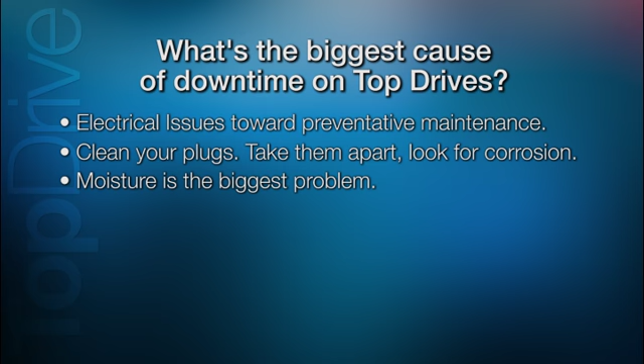It just depends on what part of the country you're in. If you're in Texas, there's a lot of heat. But when it gets cold and it goes back to heat, it causes that condensation. Same thing in North Dakota. It's just a little more extreme, because you have extreme cold going to not so cold, and when they're opening and closing them, they're not protecting them the right way.

I think the biggest mechanical issue would be changing oil. The oil changes and the frequency, and how often we send off our oil samples. If a rig manager is not keeping track of his oil samples, we're monitoring it here, and they are too. But if they're not monitoring it the way they should, then that will definitely cause mechanical issues down the road.

Yes, you're still seeing it where they're picking up with weight on the elevators. That goes back to training. We have a lot of high turnover in the oil field, and we're bringing up new people, and we've got to make sure they're being trained right. Just the simple things like that, knowing when to use certain equipment and how to use it. If a person's not trained, the fault goes on us for not training them right.

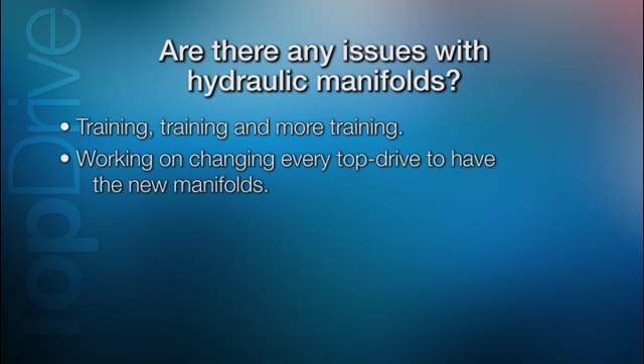Dave, we developed a steel manifold, and actually it's already out on 3 of our rigs, running good, haven't had issues with it, and we're working on changing every top drive from here on out. We'll have a steel manifold in it. We've had good reviews with it, and it's cost effective also.

I'd stress checking plugs. When you rig up and rig down, even with the new builds that we have, we don't take the derrick termination section out. It stays connected. But we should make it a habit to get up there and check it, completely take them apart and put them back together.

Because a lot of the downtime we see, you say electrical, but it's really just preventative maintenance and plug maintenance. If you don't know how to take care of that cord, you're going to burn it up. We're going to have to change it out. Unfortunately, it's a really expensive part.

No, I mean, it's training. It's who you're going to train, the next person up. The guy that's going to take your place. You want to make it a point that he knows what you need him to know. Because if we're not training them right, I said this when I was out in the field, you can't yell at the person for not doing something that you never showed them how to do.

Basic oil leaks, coolant leaks, engine vibration, anything that looks out of the ordinary, loose bolts, loose fittings, anything shaking, anything that shows signs of something wearing or something not tight. Every tour, at least 2 times a shift.

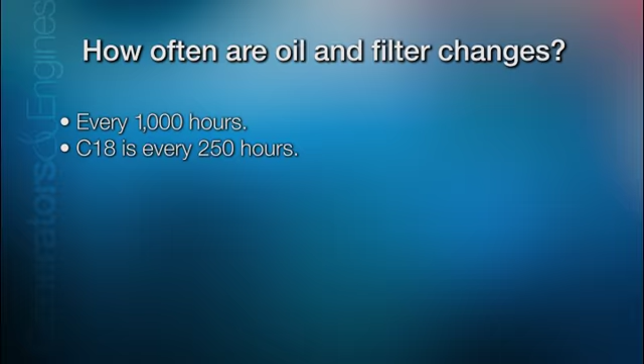On the 3500, there's actually a monitoring system that tells us when air filters are dirty, but if the motorman goes out there, takes a look at it and sees that the filters are black and dirty, change them. Don't take them off the rig and blow them out with an air blower. Actually change the filters.

On the engines, if it's got a drive hub with the fans, yes, they do have grease points on your idler gear and your fan bushings and your fan bearings. The thing is, as with the generators, we're trying to make sure all the guys are going out at least every 2 weeks and putting at least 6 or 7 pumps of grease per fitting.

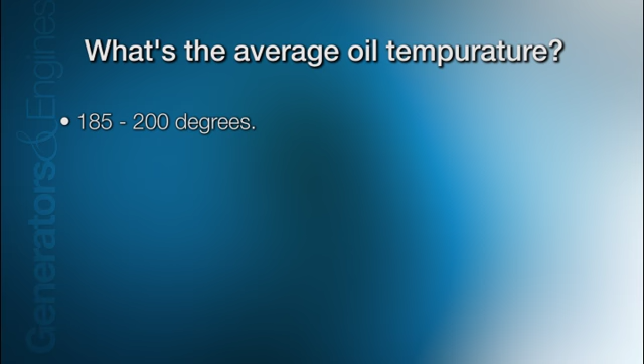The oil temperature is going to run about the same temperature as water temperature, as in the water cools the oil, so anywhere in between 185 and 200 degrees. If an engine's having a leak that we're having to keep the engine running at the moment to get us by, yes, we can put a little bit of water in it. But if it's not a leak, no, we should put coolant.

Any engine should have coolant in it, because the electrolysis in the water will eat up the block of the engine. You need to shut the engine off and fill it from the bottom, push the antifreeze up through the top. We need to change batteries at least once a year. It's cheaper to change a battery once a year than having a downtime.

Yeah, the Motorman report needs to be filled out with actual degrees, temperatures, you know, is it Celsius, is it Fahrenheit? I need to know numbers. I don't need to see an okay. I mean, okay, is it running a little warm? Is it running too cool? The engine's got to perform at a certain temperature to be efficient, so I need to have full numbers, temperatures and stuff like that. I don't need an okay.

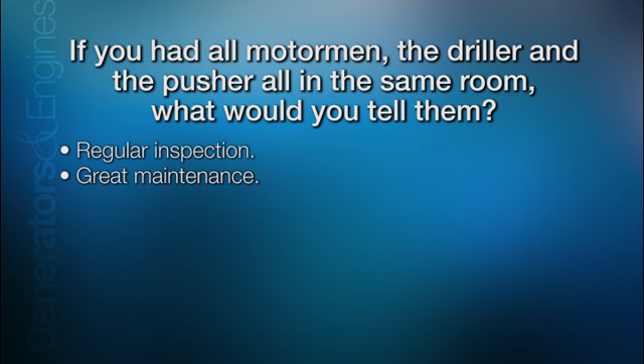Inspecting an engine and maintenance intervals is the number one key to keeping an engine's lifetime history. If you keep the maintenance intervals at the points that we set, it prolongs that engine to keep it going. If you bypass the maintenance intervals, you start having equipment failure, equipment damage. So anything that's out of the ordinary, bring it up to somebody's attention. Get a hold of somebody that can come out here and fix it, take care of it. That way it's not a failure.

Overheat, dirty radiators, lack of maintenance on our engines. Generators not getting bearings greased per intervals. So from $5,000 to $40,000, and if it's a complete engine failure, then you're looking at $145,000 to rebuild that engine once it comes into the shop. And that's not even the cost of the trucking to get another engine out there and back. Same on a generator, bearing failures are anywhere from $20,000 to $40,000. So maintenance intervals are a key to keeping this equipment up and running.

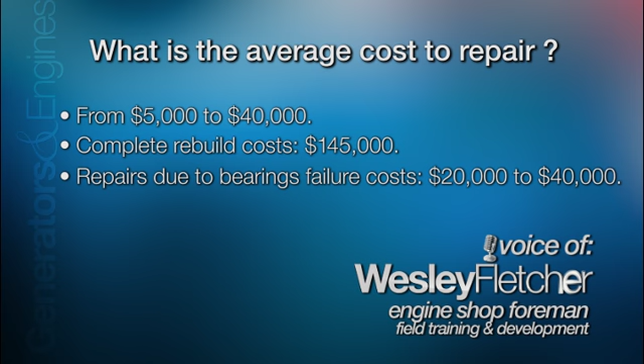We'll go through the fuel system, DFEs, engines, grease points, shut-off, lockout, tagout, everything on this end, and then we can kind of wander through the rig. You want to wander through the rig a little bit too, Frank? Well, no, because we're different parts of the tour. Just want to stay down at the drive house. Just stay in the drive house, go through the engines, and then maybe go to your shop, show you guys.

These are 3512s. It's kind of a standard engine package in the field. Just about everybody runs them. There are bigger rigs that run 3516s. Obviously, you get into a 2,000 or 3,000 horsepower rig, you need more engines. We're building the engine package for Mexico, and it's got five 3512s.

Fuel systems, we just burnt the pumps off of a rig this weekend due to fuel system failure again. So there's going to be a campaign coming out pretty quick about inspecting fuel lines, fuel systems, making sure your valves are in proper working order.

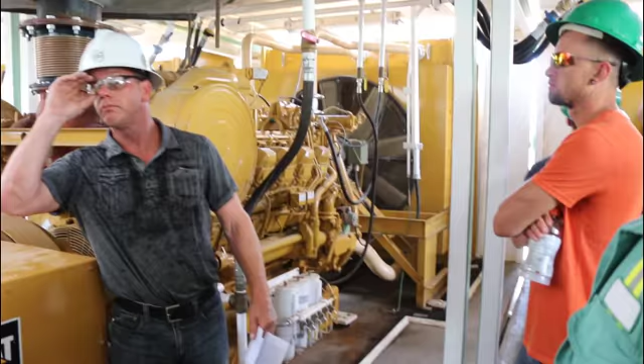All the fuel runs overhead. It's an open loop system. So it goes from the fuel tank, comes in, runs across, down. Here's your shuttle line. This is return, and that's feed. These engines require 20% of the engine's cooling to come from fuel. So we have to have a huge amount of, not pressure, but flow.

So don't ever work on an engine fuel system with the engine running, because you really have no control on that. And that's what happened in that situation. You didn't cut off the engine? Well, I can't speak for him, but there were two engines running and one was shut off, and he decided to work on the fuel system of the one still running instead of shutting it off and starting another one. But anyway, fuel systems, they happen to burn down very quickly. These are set up to change on the fly? Yeah, that's exactly what these are.

You know, you always have to have one on, right? But you can change those on the fly. I really don't recommend it. Yeah, in case something does happen.

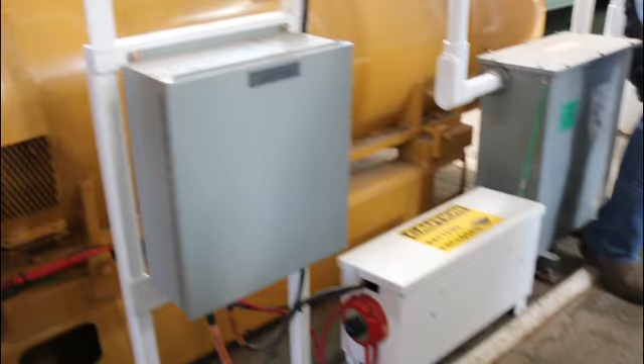Yeah, true enough. Batteries, they're all equipped with, right behind you there. Every engine is equipped with its own set of marine batteries. There's two 12-volt batteries in there. Anybody know what the voltage on a 12-volt battery is? 12 volt. A fully charged battery is 12.6 volts. They say a dead battery is 12 volts. So combined, you should have 25 and a half volts.

These engines will die once the voltage drops below 20. That's why they have their own separate. So if you have one set of batteries running three, you lose your batteries, now you're on downtime. They're all equipped with their own battery charger in that box. That's one of the things that really a motor hand should check is the quality of his batteries, the connections. Make sure that there's no corrosion, and these are all maintenance-free batteries. So you don't have to add water or anything like that.

That's another huge problem we have, bearing failures on these generators. We bring them back and you ask the push, have you been doing your maintenance? Yeah. But when we get the generator back and tear it down, we can see that nobody's greased this generator in months or years, right? So there's a grease line right up here, and there's a grease zerk right there in the back.

I think it's 6 ounces every 12 months. I believe a tube of grease is 14 ounces. So those bearings take, give or take, a half a tube of grease every 12 months. You can do it quarterly, give it a quarter tube or whatever, right? Can't hurt them. These things have got grease drips.

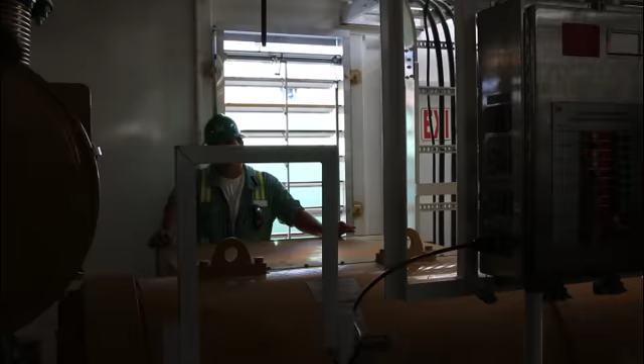Yeah, the grease drops on the bottom. So you can put a couple hundred tubes in, but you'll just have a couple hundred tubes on the ground, right? But at least we put grease in it. And that's costly.

Depending on how bad the bearing is, if the rotor... everybody know what a rotor and stator is? Rotor is obviously a rotating part, stator is a stationary part. If they touch, it'll be about a $40,000 repair. This whole engine package is $400,000. So it's not a little 350 Chevy, right? You build a really good 350 for what, a couple thousand dollars?

Yeah. So without them, it's the heart of the whole rig. Without it, we got nothing. Every piece of the rig is important, but obviously, because I take care of engines, it's the most important.

We'll walk through there, air compressors. Obviously, compressed air is a trap waiting to get out, right? So be very careful. If you are blowing something off, make sure that you don't have it in your hand or something. I've never seen it, but I've heard stories of people injecting the air and stuff. Yeah.

So we'll go through there. It's set just like everything, set at factory. This is about 118 pounds right now, and they'll be set identical. They do require oil changes. That's why they have oil filters. They don't take a lot of oil, so it's not costly. And obviously redundancy. We got two of them, so you can leave one online and change the oil in the other one.

Obviously, you guys have motor hands. You should have some kind of a maintenance book. Your push should. What are these compressors going to be feeding on the rig? Well, they don't feed a hell of a lot other than a few clutches, and then obviously air for startup, but we don't really have any winches. So that's why they're not very large.

What else you guys want to talk about? What's this space here? This is a work area.

250 to 500 hours, they give you that leeway to change the oil. The big ones are 1,000. Caterpillar recommends every 500 hours, but we did a pilot a little while ago, so we kept sampling our oil to figure out where a safe hour range would be. And at 1,000 hours, the oil still has its properties and capabilities.

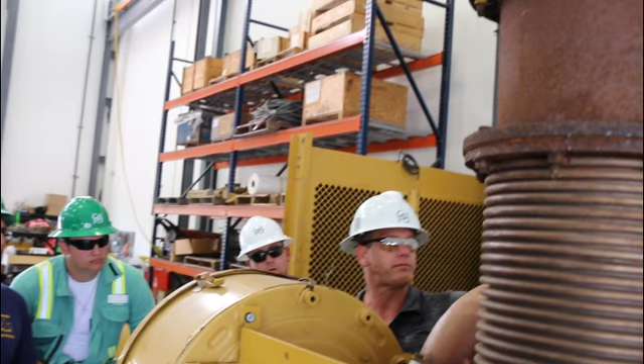The engineers could have done it slightly different. It's called a micro switch. And all it is, it's got a little ball in there. And it runs a circuit from here to that one, back over to the other side to the same micro switch. And what happens is from the vibration, and there is a bit of soot that goes through here, the carbon builds these up, and then it'll just shut your rig down. Because this circuit gets cut, right? It's not a circuit anymore.

What it does is it grounds the ECM, so it just kills all the power to the injectors, blah, blah, blah. So no matter what you do, it won't crank, it won't do anything. So many of them out there. And that's one of the reasons a lot of the contractors use them.

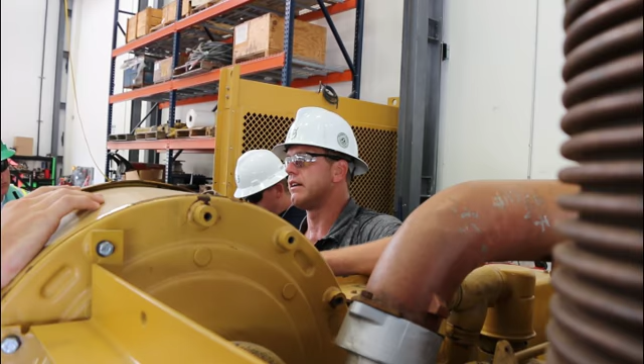There's Cat dealers, they're everywhere, right? They're in San Antonio, they're in Odessa. Every engine's a good engine, but they're gonna break down. So the difference is being able to get parts, right? Get mechanics. And that's one of the reasons why we use Caterpillar. I can phone Joe's engine shop and tell him I got a 3512. He knows, or he's got a mechanic that can work on it. Anybody? Nothing?

Right? These sock filters are cheap. It's easy to pop that cover off and pull that thing out there and just change that sock filter, and not the whole filter. What's the interval, monthly, semi? When you see them dirty, due to the fact that West Texas, some days are dirtier, then if you go up north, you may not have near the dust that we do in West Texas.

But, yeah, and them are $2.88, I think. They're very cheap compared to that filter. And you can take it out, throw it in the trash, slide another one on there, put the air cleaner back in, and you're back to business. So,

coming from the farm, years ago I watched my dad take the filter off of the tractor, bang the dust out, blow the dust off, slam it back in the tractor. That is not a practice that Precision does. We don't mechanically clean filters. You can actually take your filters in and get them cleaned. So now, obviously, they're engineered, right? Everything is engineered. So as the filter gets dirtier, it becomes more efficient, really, right?

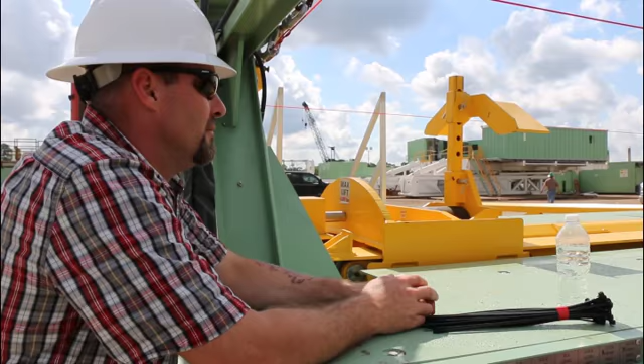Where's the control for the floor doghouse? The control's right there in the corner, inside where your track is. Yeah, you slide that pipe in there, holds it in there, so that way it doesn't back on. But we're not supposed to work anything overhead here. So if it does get stuck up there, we'll get somebody out here to bring it down. Usually if something got stuck up in there, we'd have you put the pin in there just to keep it from falling. But then we'd send one of our guys out to lower it down for you.

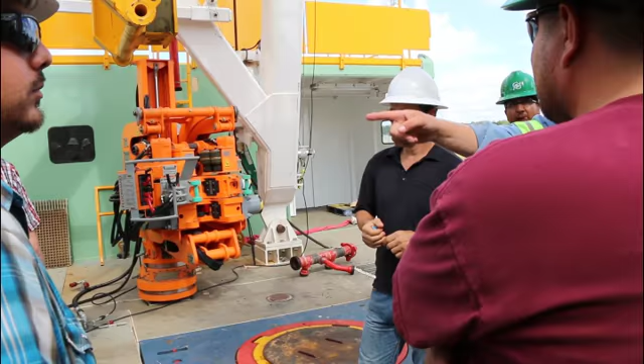It's the first version where you can actually see the drum from the doghouse. Where you can what? Actually see the drum from the driller's there. Drawworks is mirrored on the last one, so this brake guard goes over here, so it limited your visibility. Right out the A-leg spread, so you got more floor space. You drop the rotary table down so it's flush with the floor now. That's almost it. We took the 3 good features that NOV had and we incorporated. Setback has been increased, more racking capacity, 25,000 feet now. Include of 850, I think it is, right?

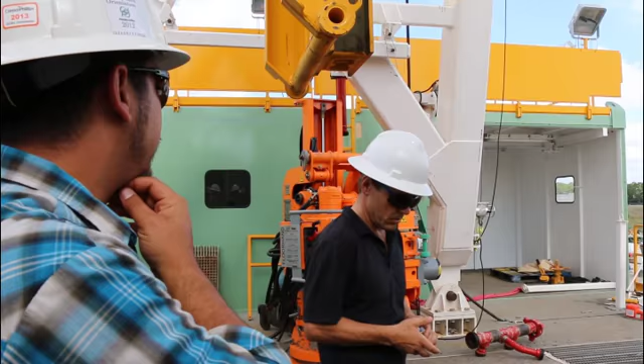850. What are some of our main safety features on the rig floor now? We do have a mouse hole slip bowl so that you can do stands offline as long as you're taking the precautionary notes. The dropping of the rotary table was a safety feature. We've rotated the drawworks so that the drum is visible from the floor, from the driller's console. The iron roughneck's been repositioned slightly; I'd say it's as safe as it was before. There's nothing really changed there. Will it reach the mouse hole? Yeah, the wrench will reach both mouse holes.

These rigs are originally designed with 2 mouse holes. Because we run range 3 pipe, which are 45 feet long, you can put 2 joints in, screw into the first one, pull it out, screw into the second one, and then build a stand on the fly as opposed to building it offline and then grabbing it. Another standard across all of our rigs now is anti-skid on all of our rig floor walking areas. Like you said, they dropped the rotary table to be level with the floor, so it's not a trip hazard. We're still going to be installing rotary mats with skid material on them with the danger zone painted on there. Just like when you walked into this area, on each A-leg there's a stop sign saying beware of the danger zone, just like in front of the drawworks.

Those signs are there as a warning, as an acknowledgement saying stop. Look at what you're about to walk into, look up, look above. If there's operations going on, your third party coming up here, that stop sign hopefully will stop you and alert you that there's operations going on here.

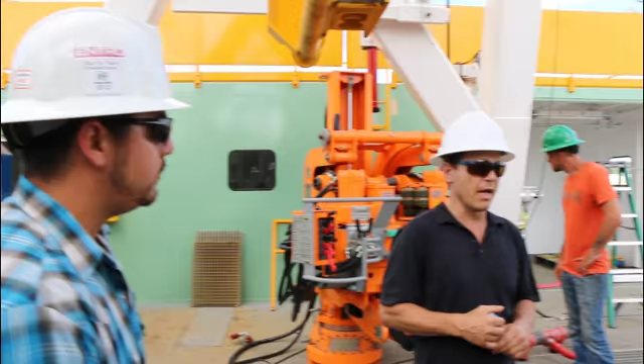These are all different things they've added into the system. But just like anything else, there's that human error. The system's only as good as the person operating it. There are two other features we've added with the block system now as well. Monkey board collision. There are set points that you choose in the derrick. There are actually two systems. One's mounted right on the main leg at about 67 feet. If the elevators are extended out at that point and you pass through it, you're going to get an audible alarm in the doghouse.

Just as a reminder, it doesn't stop it, but we're also adding that feature right into the Amphion system, so it'll act just like your lower limit and upper limit. If your elevators are extended out either above or below the board, it'll slow you down or actually stop you, and the only way you can carry on is to hold the override button with your elevators extended, right? So after a certain point, yeah. So you can push it out close to the end of the board to assist the derrickhand. Pipe in the hole, it ain't stopping, right? That's right. No, it will.

Right, because when you push the pipe out to assist the derrickhand, as soon as he has it, you hit float and down you come, right? As soon as you're in float mode, it'll allow you to go up and down because the elevators are back on well center. It's only if your elevators are extended out and you're coming up or coming down. If you're stopped with it extended out, there's no problem. I would assume running in the hole, isn't the derrickhand throwing out to the elevators? That's what I'm saying, but you already have your elevators extended. Oh, okay. Depends on how you're doing it. I didn't realize that. I would see them run pipe with the derrickhand going out to the elevators. The elevators aren't extended up to him.

Are you guys running them where you're extending out to them? Exactly. Right past the back there, on the top. Just throw it in. But you're not out past the board. Yeah, so as long as you're not out past the board, you're all right. Because on the link tilt there's a linear position system that tells it where it's at. It's set so to the front of the leg it's still clear. It doesn't consider it interference. It's only when you pass that. So as long as you're not past that, you don't have a problem.

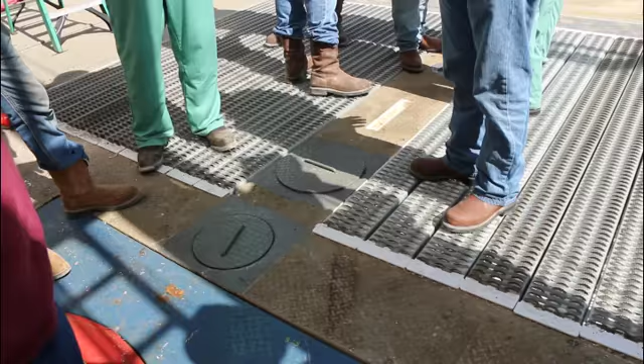There's a third mouse hole here, guys. What that's for is our test stump. We have what we call our Stack Rabbit BOP handling system. There's actually a test stump on it, so you can test offline. You can stand the stack up back there, and that's a place where you can drop a joint of pipe through it and test offline. So you can pre-test all your BOPs.

The lug in the center, it flips up. You just want to pull that up on the front. You'll see that. What that is, we call it a logging lug. So when you're logging, you got your sheave here. That's just a place to tie it off, right? It's a certified tie-off point for it. I mean, you can use it for a lot of other things too. That was its main purpose. Then it lays down flat into the floor, so it's not a tripping hazard.

Features that we've had on the floor, and we're still installing it. We're waiting on equipment. As you can see, we still have a lot of construction going on. We're getting things buttoned up. We will have a shower eye wash station available on the rig floor in case there is an emergency where you need to rinse off or wash off your eyes for some reason. There'll be a shower and eye wash station in that area. So everything that we install is easy for rigging up and rigging down. That way equipment gets put up and maintained like it's supposed to.

In each one of the buildings is going to be a fire extinguisher. Depending on the kind of building it is, that's what kind of fire extinguisher is going to be associated. If it's a drive house, electrical house, it's going to have CO2 fire extinguishers to fight that type of typical fire. Inside this building for the dog house, it's going to have two different kinds of fire extinguishers, one ABC and one CO2. That way, if there's a fire on the floor, you have an ABC available, but there'll also be, at their entry points to the rig floor, a fire extinguisher available.

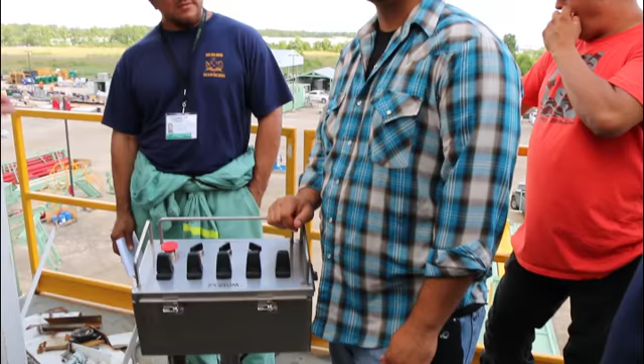Just keep in mind that's what this is. So make sure that this is maintained and works correctly. You don't just pull on this, you have to actually twist it to release your e-stop. You've got to have your foot maintained on the pedal at all times, go to function and work the equipment.

I know it has enough cable here, but you don't want to have this in a blind spot where you can't actually see visually down to the catwalk. We don't have this on the other side. It can be removed and moved around the cable. I don't know what the length of it is, but I'm sure you can position it in an area where it's more comfortable for you.

Most of the time, you're going to have all the pipe on this side, and you're going to have the stuff coming up. So it is movable. It's not fastened to the floor. You can move it around. It's not a wireless unit. I know some of the catwalks have wireless controls, but a lot of that's not getting maintained. They're dropped, they're left out in the rain. They get damaged. People lose the keys for them, and guess what? You have to work them manually down there.

This isn't going anywhere. This is a lot better. Very easy. Labeled exactly for the function it's doing. It's got a good safety feature. This is where all the magic happens right here. A lot of people don't realize this. Whoever's sitting in this chair has everybody's life out there on the rig floor in their hands. They can control anything and everything that happens, so whoever's here needs to be paying attention at all times.

This joystick pretty much drives your top drive or your blocks up and down by using the motor. And like Steve said, this is actually an AC rig instead of an SCR rig. You're depending on the weight. When you push it forward, you're telling that motor to run a certain way. We're not going to go through the touch screens, because you guys are going to do an Amphion class, but this is pretty much the most important things you need to know.

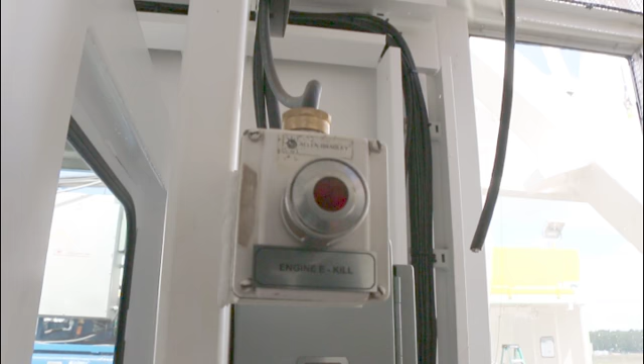So another e-stop we have in this building, this will shut down everything on the rig. This is the generator. This will shut down the heart of the rig. For some reason, if there's something out of your control, this is last resort, that there's nothing working, your engine kill. This will shut down all power to the rig.

Emergency lighting will come on, and your Amphion screen will stay on. Part of the reason they put that one up there, that's your oh shit button. You're going out this chair to hit that button and out the door. So that's why it's mounted where it's mounted.

Yeah, we've had a lot of times where they would have an issue and they need to kill Amphion, and then they hit the button and we actually dropped the blocks on a rig up in Pennsylvania a couple of years ago. So that's why we moved it.

Other features inside this building, we will have a little eye wash station here, bottle eye wash station. The first aid kit will be mounted in here. Material safety data sheets will be in here, which is going to be that new global harmonized system that will be incorporated into this building. So all your material data sheets for hazardous materials on site.

Emergency contact information will be filled out per site on that board. And of course, your driller's days for each driller and the crew. How many days did you work safely? That'll all be maintained in here.

Fire extinguishers on each door, one CO2, one ABC type. That way, depending on the kind of fire you're fighting, like I discussed outside, you will have those available to you. I put them on the doorway for the one fact that I want you to be by an exit before you're going to fight a fire. I want you to be able to make sure you have an escape route. If I mount it in the middle of the building and there's a fire, well, someone's not able to come in to grab the extinguisher to help.

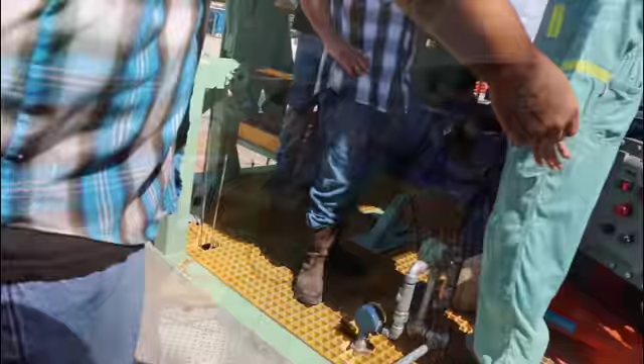This is our gang. These are our gang colors. This is our gang sign. So let's take care of each other, right? A lot of rigs don't have, standing out like a sore thumb, there's a camera system down here.

It's not a functioning camera where it actually rotates and pans or things like that, but it does have visual on your shakers, so that driller can have that acknowledgement of what's going on down there. If he has issues downhole, you can see at least if there's maybe an excessive amount of flow coming over the shaker. If he's not getting any flow back, you can actually have it zoom in on this as one shaker.

Other safety features, of course, all the equipment has E-stops on them. For some reason, the shaker's not working right, this equipment's not working right, E-stops on everything. All equipment comes with an E-stop. That way, if there's a reason to shut it down, electrical problem, kill the power to that equipment.

We try to maintain the floor so it makes it a lot lighter. Doorway entries, all fiberglass. Makes the tank a lot lighter and a lot easier to lift up. But it's very durable and it's built in with anti-skid. So gripping up here, you won't have to worry about slipping and falling. Like I said, all walking surfaces have anti-skid painted on them and must be maintained. If it gets worn out, you're dragging heavy equipment across it, it's going to chip just like regular paint on the bed of your truck. It's going to come off.

The other cool thing about this, they do have hydraulic raising cylinders for the roofs. All rooftops on these tanks can be raised and lowered hydraulically. So that way you don't have that overhead danger of having to get it picked off and trying to stab pins in there. All you do is knock out your main pins, step away from the header in that buffer zone, operate it from control, and lower that roof down. Makes it a lot easier for rig moves, a lot safer. Like I said, the rooftop as well has safety cable up there, so if you're going up there to wash and clean, you also have that available to you.

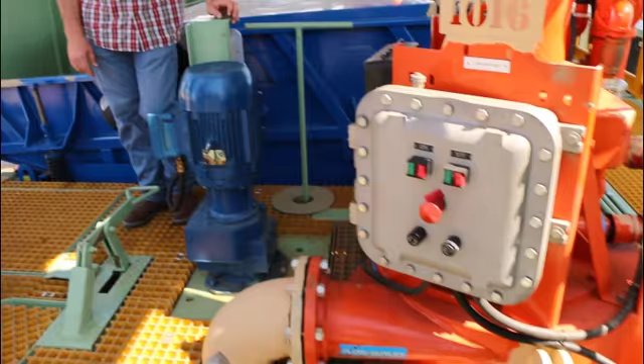Of course, you see where that fitting broke off. It's a shock hazard. Somebody might have been in this, an electrician might have put one bolt in it, worked on it, forgot about it. All this is sealed tight and explosion proof for that rated shock, so it's all ground faulted. So, off and exposed to electrical hazard. Fittings, any fittings on that traction motor, on the motors, broke off. It shouldn't be broken off. If it's broke off, you have potential for shock hazard there. So every time you're working up there, guys, gotta pay attention to that.

If you're going to hit gas anywhere on this rig, it's going to come from right here. These fittings, if you guys look right here, are sealed with Chico. It's like cement. It's to keep gas and stuff out of each one of them. But this whole area, 5 feet away from the shakers, is considered Class 1 Div 1, and anything above it is Class 1 Division 2. Class 1 Division 1 is where there's explosive gas.

Part of the reason why he was talking about these bolts being in here: how they make these panels, they actually put these in a room, and it's going to take this many bolts to hold this door on if this thing explodes, because this door will kill you too. The bolts are not designed to keep gas out, they're designed to keep the door on. It's designed to hold this whole thing together.

So if you don't have any bolts in here, not only is it against PD policy, you have to put one in it, but OSHA as well. They'll come out and they'll fine you, and it's like $2,200 for every bolt that's missing out of this panel. So it's real important to make sure that all your bolts and stuff are together.

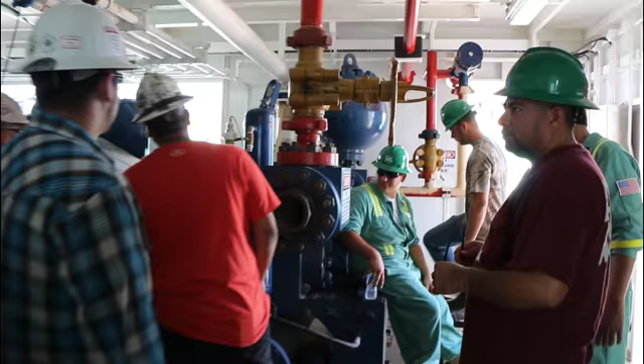So a lot of our safety features are on the pump itself. Pods are all locked up. Everything's locked up. To get inside to change your liners, wash pumps or whatever like that, it's all isolated, locked up. The only way to get in there is to get the key from the rig manager. He should be the only one who has the key to get inside those.

Also, a spring-loaded pinion to roll the pump. That's been installed in all rigs. Any new rigs and all the ones in the field should have that installed already. They had an incident where a company man walked by, and someone left the wrench inside the pump and decided to turn the pump on. Guess what? He got picked up, flung around. That's a feature that's on there. So that way, you have to apply pressure to keep that socket inside there at all times. As soon as you release pressure, that socket's gonna fly out, fall down. It won't stay in there.

Anti-skid on the whole floor inside this building. A drip pan is standard with all these rigs now. It's not going to contain all the fluid, but it will at least help you know that you have a leak. All the pipes, all electricals are run overhead, clear walking space. So let's eliminate some trip hazards. That's why we moved everything up, so you guys can walk through here.

Like I was talking about E-stops, both pumps have their E-stops, back right corners. I'm still going to be applying signage back there that says emergency E-stop with an arrow pointing to where it's at, an actual sign right where the stop button is. So if there's ever a reason down here something goes wrong and you're right here in this area, it would shut it down.

Each building's equipped, it has horns in here. For that reason, if there's a BOP drill, fire drill, or man down, you'll be able to hear that horn going off in here. Nowhere on this rig are you not going to hear it. There's horns on the tanks, horns in here, horns in that gen house. Those are all safety features, because I used to work with motors, be in the gen house. BOP drill happens, guess what? I don't hear a darn thing. But now every single piece of equipment has air horns on it as an added safety feature.

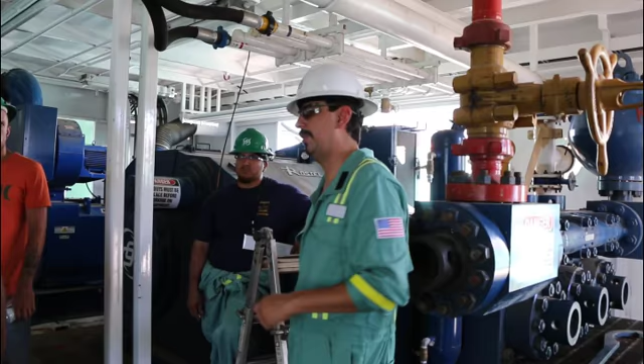If you look at these blowers, they're all inlets and outlets, so it sucks air in and blows air out, so nothing stays in here. It's also designed for your pressure washer; everything's grounded here. Grounding is very important in all these houses. Ground rods and ground cables. So if you walk by and that ground rod's laying on the ground, that cable on it is doing you no good. Or if the ground rod's on the ground and the cable's broken off, not touching it, it's no good.

The type of rig this is, it has a lot of really sensitive electronics in it that control everything. Even your panels down here, your starters down here, they're different kinds of starters, and everything on the whole rig is really sensitive to ground. If you don't have it grounded right, and we have an issue with, say, the top drive, which is a pretty normal part to have ground problems, it can blow up just about everything in that house and put a rig down for a long time. So grounding the rig is probably the second most important thing you do when you rig up.

This turns on all your control voltage and all your PLC, all your MOXes, your SBCs, pretty much everything that you need. Down there, those cabinets are your main breakers for your generator. We were going to go through and show you how to put the engine online, but I don't think we're at a point where we can do that. Has anybody ever explained to you guys what it means to put 3 engines on the same bus? I know you know you're putting 3 engines online, but has anybody explained what it means?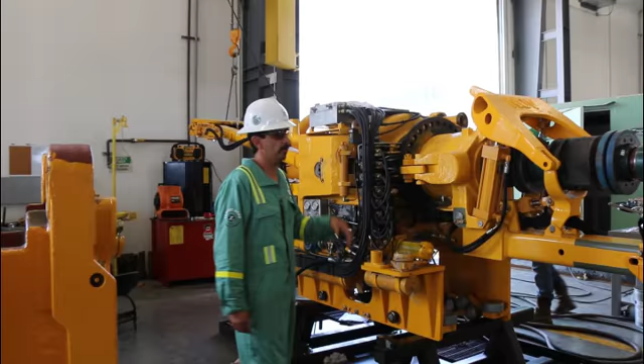Biggest part on this, you got the hydraulic bank here. You have a rig up switch here and rig down. Rig up, rig down. This manifold here is $28,000, just the manifold, not including labor. When the guy's leaving on rig down or rig up, what it's doing is bypassing. So when you rig it down, you bypass, takes all the pressures off the complete top drive, all your hoses, just in case it gets bumped. Hydraulic hose gets pulled off, doesn't shoot hydraulic everywhere.

Let's see, here's a switch here. There's a run, shut down, and rig up. So when you rig it down, shut down mode. You're working on the top drive, shut down mode.

If you have to change elevators, or have to change your dies on it, rig it down, get that rig down, and then put it back on run. What happens, you got your RV1 and RV2, and what this top drive does, it builds pressure and it releases pressure, runs on a cycle, about a 40-second cycle. Pressure's up, pressure down. That's accumulators on it. This one has 3 accumulators on it. One's for your backup wrench, one's for your IBOP, and one's your system pressure.

So what the switch does, like I say, rig down releases pressure on it, you move it around, nothing more to worry about if anything happens. Rig up, same way. Put it on rig up, it doesn't give you all the pressure on it. It gives you enough pressure to get your elevators on, connect your IBOP on it. And when you go to drill, leave it on run. It's good when you rig it down, shut the power off, go back, and put it back on run after you shut it down. After everything's power is shut down, nice to remember, go put it back on run. That way you don't forget.

There's a pump you get with the top drive, and that quick connect there, we hook into it on your driller side. So you pump oil into it. Like I said, the bladder is a big problem here. Once it heats up, you start getting oil spilled. They'll call in a service tech saying there's an oil leak. The guy spends an hour and a half downtime looking for an oil leak, finds out it's the bladder here. The whole oil expanded. So all this is, is a breather for the bladder. This is your indicator here. You get a little ball in there. Whenever you have your amount of fluid in there, your 25 gallons, it will float to the top. That's where you want it at.

On your hydraulic. Now your gear oil is right here. The gear oil is 15 gallons of gear oil. And you fill your gear oil up to the top of your top drive through here. There's no filler station like this, a hydraulic. Hydraulics pump in, and your gear oil you pour it in there. 15 gallons of gear oil.

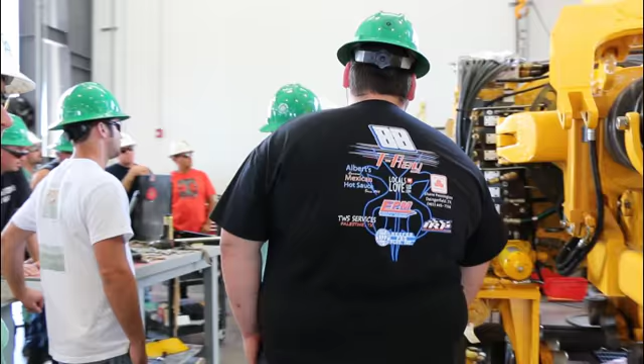Traction motors. Each traction motor has grease. This will be done by the technicians. We use Pearl grease on these. We don't use that red 77 or Mystik. That Mystik turns to liquid at a certain temperature, 130 degrees, 140 degrees turns into liquid. What happens is you get liquid in here. This part's not too bad. It will blow out with the fan, but up here, when it turns into liquid, it does go to your traction motor, shorts the traction motor.

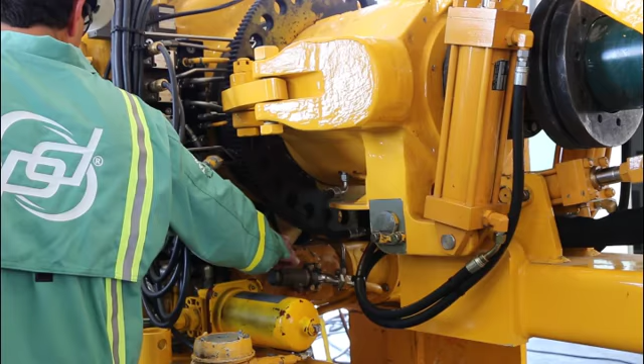You got your hydraulic motor, 600 volt motor. You got a pump on it, and your pump pumps this hydraulic motor, which has your gear motor inside, your lube oil pump inside. So you got a pump running another pump. So the hydraulic fluid's running, it pumps your lube pressure. That's where you get your lube pressure from.

Lube pressure is 5 to 20 psi on the systems. Anything over gives you an alarm. Anything under gives you an alarm. It will let you run over. It won't shut you down. If it does go below 5 psi, it will shut you down. If it shuts down, we know we got either a hydraulic lube pump issue, or your hydraulics are not pushing out enough power for your lube pump to run.

You'll have a lot of hydraulic problems. Yes, we do. We do have mostly electrical, but we do have a lot. Your hydraulics run over your electronics, pushing your hydraulics. So to test on these, you got some little buttons right here. You can push these in manually and see what your system's doing. If your link tilts don't run on your joystick, send your guy out here, he can push one of these in and see what it moves.

Your link tilts, if you look at these, there's ones with singles on them. There should be two with doubles. This one here is a double, and there's another one right here that's a double. So one's your link tilts, and one's your iBOP. The other ones are singles; your gripper's only a single.

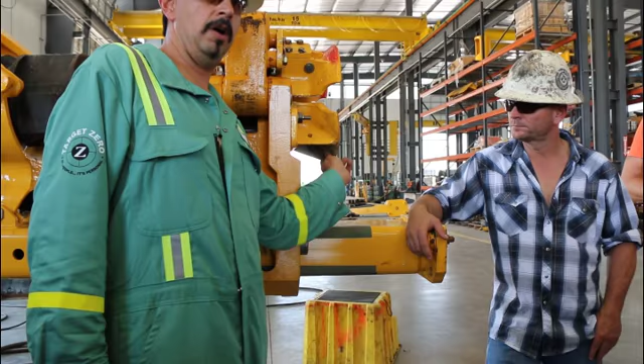Another safety feature we put on all these, we welded the size of your stabbing guide on the inside of these, and we put fall protection on this. We had a problem with the guys putting the slim hole, and when they rig back up, they leave the slim hole and run 5-inch pipe, and they'll bust these off.

I don't know if any of y'all, Canrigs will open up, expand on them. These don't. Canrigs open up, close, so if you do put a small one in there, it will force them, you'll wear them down, but they won't break off. These they will. These will break bolts off. We had a couple instances where they had fell down to the floor.

Which car? Canrig? Canrig top, it's a different top drive. It's Canadian. Nabors owns it. Yeah, but we do have a few of those. We all went to all TDS-11 while we were buying new TDS-11. We have bought a few Canrigs for international. 750 ton. They don't make a 750 ton NOV.

Another safety feature we put on this is this cable in here. We had a few problems with the drillers coming down too close to the floor and breaking this off. Backup wrench falls completely off. Luckily it's been low to the ground. When they picked it up, it fell down. You don't have your pins in there. We had another one where the thing was broke off and the guy seen it, who knows how long it was broken off there. But luckily we did have a pin in here holding the back so it did not fall.

This cable runs from the inside here to the backside here, so if it does break off, it will catch the backup wrench or grabber. Falls down, catches it.

Also another upgrade we did, these pins, we have a problem with these pins backing out from going up and down. They were loosening up and breaking the heads off of your shafts. We have drilled them all now, tightened them down, we drill them, pin them, so it doesn't back out anymore.

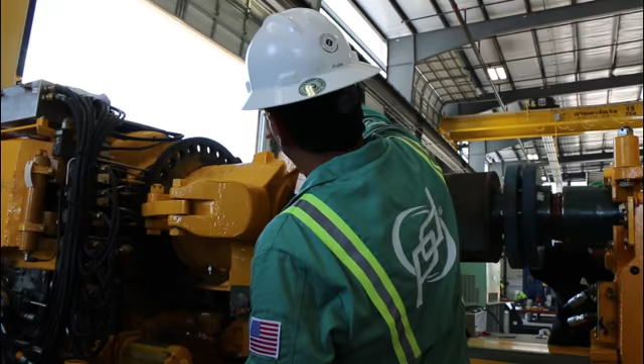You extend your link tilt out. Well, now when you kick it out, all your pressure's up here, you're pulling back down on your RLA, and then you try to rotate it. So you've got your seals on this side squished in with the weight from the pipe, and trying to rotate it. Usually it'll catch and break the seal off in there, and then you've got it leaking in your RLA. When you have a rotary leak, it leaks right through here. Just hydraulic fluid leaking through here.

There's a seal on that stem. There's 2 seals, and inside that seal there's a peephole for your overflow. That seal usually breaks when you rotate it and pick it up. When the bottom seals break, you get oil coming to the bottom side. When the top seal breaks, you get oil over top of your drip plate here. So you get oil coming out of here.

A lot of problems we have too is your shot pin. We'll go on the other side of the shot pin, lay around where you need to get it to, and the shot pin sets. These are a pain in the ass. They don't set all the time. Sometimes you have to play with it. If it don't catch the first time, it'll go around in a circle until it catches, and you have to remove it again and wait till it drops. Have you ever had that? Yeah. So that's another thing. You pick it up and you have that pin going, so that pin's pushed in.

And now you have your link tilts leaked out. Well, that pin, it's only 1.25 inches. So you lift it up and then you bust the seals on your shot pin. And the shot pin starts leaking because you always got pressure on your shot pin to keep it held up and held down.

Don't put a pipe wrench on them and stretch them out. You'll crack the casing on them. So hand tight, and then one turn with a channel lock. You have your power, your 777s. You have your 19 pin. Your 19 pin is your 600 volts. It has your two blowers, your lube pump, your hydraulic motor, 600 volts. And you have your 220 volt heaters, all in this plug.

Your 42 pin is your robotics. Your commands for your link tilt, link to the track, rotate, gripper, all on this 42 pin, and your encoder. Your encoder tells the top drive what speed it's turning at.

These are made for 225 RPMs. I know we'll never rotate them that fast, but they're rated 225 RPMs. Continuous torque at 38,000. They put out 54,000 to make up and break out. The continuous torque is 38,000.

Grounding. You can see on here, the problem with these two: if you leave these loose, they rotate, they vibrate, strip them out. Strip out, then they get lower. You can break them off when they tighten them on, they try and put the bolts on there, because these are brass. You break them off. Grounding is a big issue on the top drives.

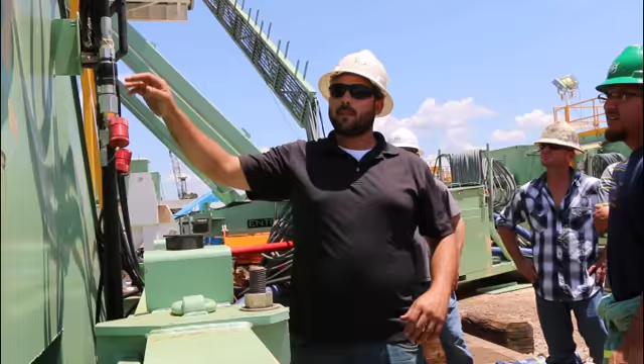Right here, guys, is one of the new features we started adding. This multi-coupling plate right here. As you can see, pull this handle, the whole thing comes off as one assembly. As opposed to before, we would have to hook up the quick connect off every single one of those lines. So we really tried to take away the... no more accidents with this.

Another good thing is they're either hooked up all the way or they're not hooked up at all. So that was another problem. Sometimes one quick connect would be hooked up properly. If the other one failed, it would create back pressure and you could blow up a piece of equipment. Well, this one here, they're either all hooked up or none of them are hooked up. So when it's...

So two handles will replace the 20 quick connects that we used to have on the front and the back side of this. So that's one improvement we made. There is a cap and cover for both sides, so you take it apart, put the cap on.

Alright guys, fitting identification, so everyone knows. This fitting right here is a 3/4 inch JIC fitting. A JIC seals on this beveled edge right here. So a female JIC will always have a cone shape on the inside for a male JIC to fit. So if there's ever a dent or anything inside of one of these fittings right here, then oil can easily bypass right through there, because this is the sealing area on a JIC fitting.

So whenever you see a fitting that's got a big gash right here, you have to pretty much replace it right away. You can't clean it up or do anything with it. It just has to be thrown away and replaced. And you can't over tighten those. If you over tighten them, you'll always crack the female side. You'll crack this cone. You'll see the cones will have a stress fracture, a hairline crack right through the center. So whenever you grab a fitting, you should always look at the connecting fitting. These two fittings here

will mate together. Okay. Now this end here is what we call NPT, which is National Pipe Thread. National Pipe Thread is the most common thing on a rig. This has tapered threads. The female side has got the opposite. So as it's screwing in, it's tapered, so it's compressing the fitting. You get a good seal.

Now that being said, you always have to put Teflon tape or some pipe dope, something like that. When you're using Teflon, it only takes about 1.5 to 2 passes to get a seal on here. If you start overdoing it, it'll always build up on the inside here, and you can blow that Teflon into the system. In anything, hydraulic system, fuel system, air, whatever you're using the pipe thread on, you don't ever want anything to be exposed in here.

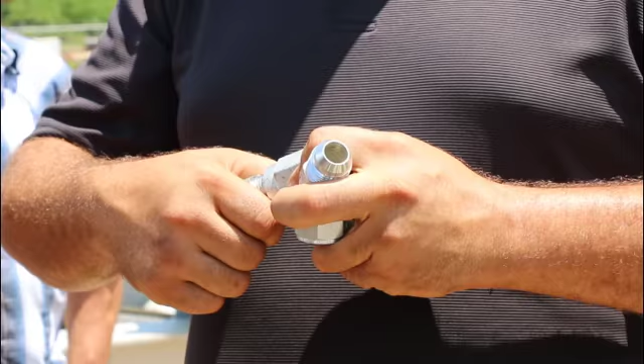You always want to leave about a thread or two of just exposed metal. So these ones here, the opposite, they don't have any tapers or any cones and cracks. So these ones here, you really have to tighten down good to get a good fit on these. But if you ever take a JIC, you shove it in here, it's not going to fit. So that's a clear-cut case.

You can never use a JIC with a pipe fitting. You can only use it with JIC. You can only use a pipe with a pipe fitting. Now the last one is just two more. We have an O-ring. So this right here is what we call ORB, stands for O-ring boss.

So this fitting here, anytime you have an O-ring, there will always be a machine groove, or a shoulder we call it, on the other piece of equipment. So if we're going to put this in a hydraulic valve, the valve will have an O-ring seat area in there. So now the pipe, I've seen guys, you can physically shove it in there, but it will never seal because you don't have the tapered threads on the female side. So screw up the whole part. Yeah, you screw up the whole part by not putting the right fitting in.

So it's very obvious. You'll see. I don't think we have anything without an O-ring on the rig. Everything's plumbed up, but you'll see it's very clear as day. You'll see a machine groove where an O-ring will sit right inside of it. You can also put a light coat of grease on here so it doesn't dry rot. It always stays lubricated. That's another good practice right there.

The other one, the Blohm + Voss, the ST-80, they come with all flat face fittings. So this is an ORFS, which stands for O-ring face seal. So these, the hose end that these go on is a flat surface. It's always a flat surface. The female half of these is always 100% flat surface.

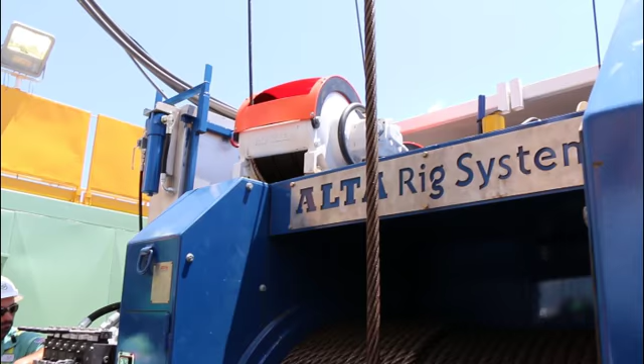So up here, on top of the draw works, you see that little hand pump over there. We put that there for the purpose of lowering the man rider. So the rig can black out, you got no electricity, you have no hydraulics, you got nothing. You can physically get up there and hand pump to lower the guy back down to the floor. There's a book that'll be in the doghouse in the knowledge box. You have step-by-step instructions on how to lower personnel down from the derrick if that ever happens.

We have the Blohm and Voss over here. All the connections are over here. How many of you guys have dealt with the Stucchi quick connectors? Everyone? So these things here are nice. They're bold. They work better than any other quick connect. Screwing them together though, you can see on these, there's an area. You can see that O-ring. Anytime you see that O-ring, it's not made up all the way.

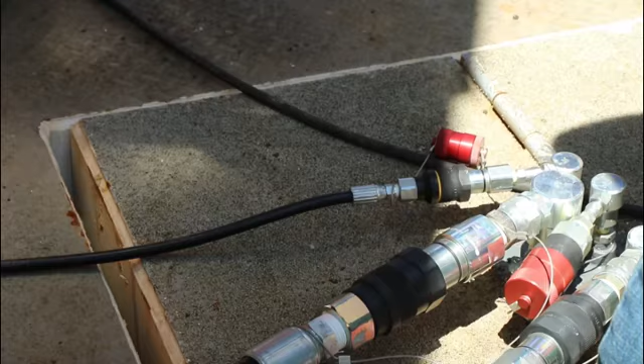So when it's not made up all the way, you have a piece of equipment and one is hooked up and one is not. It means you can send pressure to it, but nothing can return back to tank. And you can intensify and blow that piece of equipment up pretty quick. Any motor, any cylinder, pretty much anything you're doing, you're supplying oil to one side of it and it can't remove oil from the back to tank. So real important to make sure anytime you tighten these, you shouldn't see any part of the O-ring.

Anyone have any questions on how it works up here? Because the pipe threads are tapered, when you start, they're a lot smaller, and then they get bigger, they expand as you get down deeper. So you would be able to start the pipe thread in there, but you would be destroying the actual threads, because it's not a matched set. It's not pipe thread to pipe thread. So not only would you be destroying the threads, but you'd be weakening the integrity of the threads. So when you start it up, this has the potential to just blow right off.

The biggest issue that we're seeing is water in the oil, and it's usually coming from the pony rod seals, whether it's wear on the pony rod seals or just bad pony rod seals and not being maintained properly. The biggest thing is to check the seal. You can tell whether or not it's wearing on the bottom side or on one side or the other of the seal. Usually with a feeler gauge you can put that in between there, and there shouldn't be any kind of gap in there. If there is, then it's time to change them for sure. The biggest sign is water in the oil, and that's usually too late by then. No, it is the rig's responsibility to check and maintain the oil.

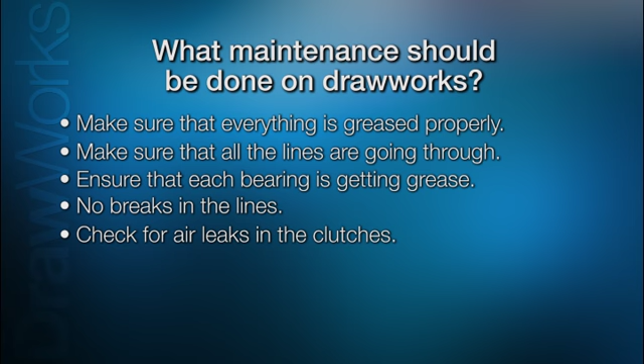You want to check for air leaks in the clutches. Make sure that your clutches are getting the proper air at the clutch, not just there at the gauge on the console. And that may consist of actually putting an inline gauge right there at the clutch to be able to check that pressure. And also on your oil, you want to make sure that the oil is good, that there's no contaminant in it. Make sure there's no metal shavings or anything inside the oil case.

Definitely, there's a bunch of them. It's mainly right there at your brake linkage. You want to make sure all your brake linkage is getting the proper grease that you need. There are some drawworks, depending on what style you have, that all your bearings are greased, and you want to make sure that the grease is getting to the bearings. Don't just assume that it's there.

The biggest thing is to make sure that whenever you're checking the mud pumps, make sure that you're listening. You're not just looking for stuff, but you're also listening. If there's any kind of knocks or anything, it could be caused by a bad bearing. It could be caused by the crosshead out of alignment and causing a knock, which would create more problems.

You want to make sure that you definitely have good oil in it and that there is no water in the oil, because that is the biggest thing that we've run across as pumps come in from the field, is that there are contaminants in the oil, and the only way it can get in there is through the pony rod seals. So you've got to make sure that those pony rod seals are, for one, installed properly and that they're doing what they're supposed to do.

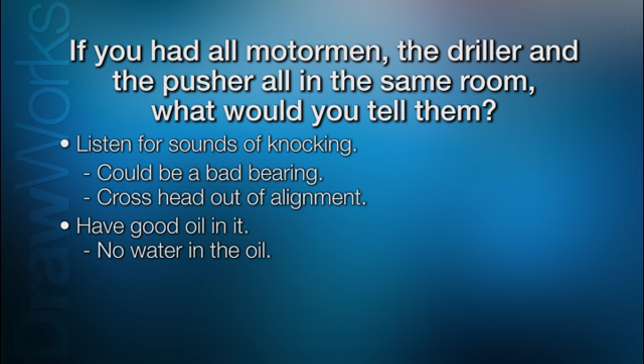That should be done on a daily basis. I mean, you should be able to visually check and make sure, and you can tell when a seal's worn or it's bad and it's time to replace. You can tell it just from looking in on the fluid inside of the pump, whether or not it needs to be changed.

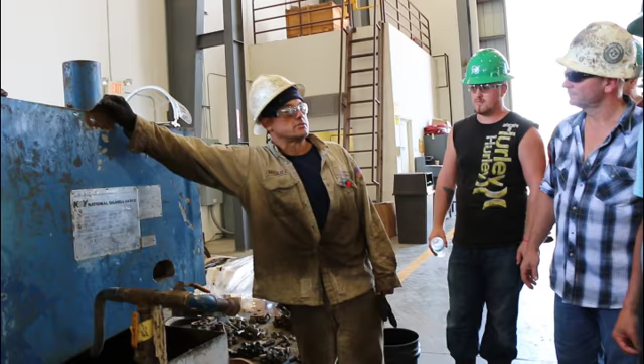You want to know about lubrication or how it works? How's it work? What's its function? Well, its function is to pump mud and water to the well. Okay. So what they call it is slush pumps. So you've got your fluid ends over here, suction and discharge. So when that stroke comes this way, it's pushing the water towards discharge. So they open the one valve and close the other one.

Right. So when it goes the other way, it sucks the water in through the suction and pushes it up to the middle. So when it comes back, this one is closed and the top one gets opened. So you're talking about from 70 to 100 pounds on suction, and it converts to 3,500, whatever the rig needs, when it comes out to discharge. Suction is only the feed line. You know, make sure this pump is full of water. And we're going to tell you something about the failures on your valves, which also create some problems on the power end. Suction manifold, you know, which is that one over there, came out of this pump right here.

Mud and the water hit it first before it gets to that discharge side. Okay, so you want to make sure this thing is completely clean. But this stuff right here, what it does, it causes starvation in the pump. What's going to happen is it's going to start cavitating real bad, and you're losing valves, seats, and pistons. So this pump is not made to pump air. It's made to pump mud and water.

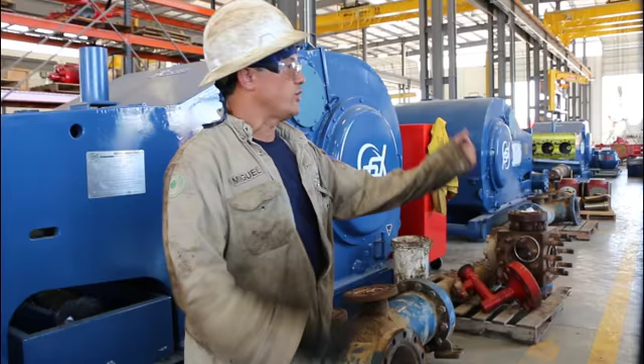Seats ain't fun to change out. Right, no. It's not, and it's not just the downtime and all of that, and you got to go through there. So I don't know if when the rig moves, they always open up the flange right here. Either this side or that side, you get a water hose and clean them out. We have some pumps in here, the gears been completely tore up, and when we take them out, this be all the way to here, mud, dry mud.

So that's why it's bad for the power end too. So when the pump is going forward, trying to push the mud, it's pushing air. So it's like when you kick really hard and you don't kick nothing. You're gonna feel it on your knees. That's pretty much what happened on the bearings over there. So that's one of those things y'all need to look out for. Keep an eye on the oil pressure.

Now this company spends money to make the clear covers. Right. Every time you swing by there, you're gonna see the oil dripping down the lines. This pump is made to run pretty much the same right here. Feel a little nipple there? Yeah. What this nipple does, we got a 5/16 tubing line coming in from the manifold.

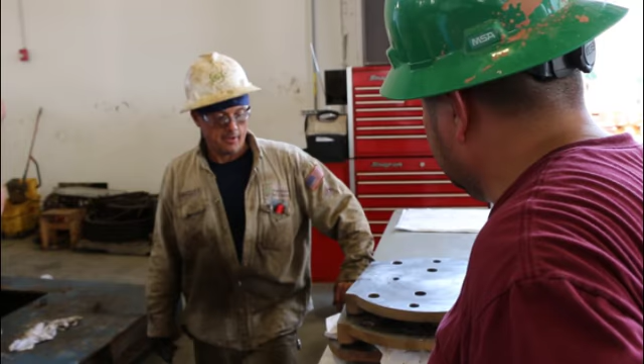And it fits here. Every time the crosshead goes back and forward, the oil falls on the cup, which is this right here. And that oil goes inside and lubricates inside the band. And right in the middle, we got another line that drips oil right in the middle of the crosshead. You can see it. You got another right in the front for the pony rod.

Okay. So that's why now they spend money to buy the clear glass covers. Every time you go by there, you can take a look. If you don't see any oil dripping there, something's wrong. Yeah. So it could be the filter in the back end is all clogged up. So it's time to stop the pump, get the filters out, and see why it's not lubricating. Because sometimes all people do is look at the pressure gauge. But sometimes the pressure gauge can be broke too.

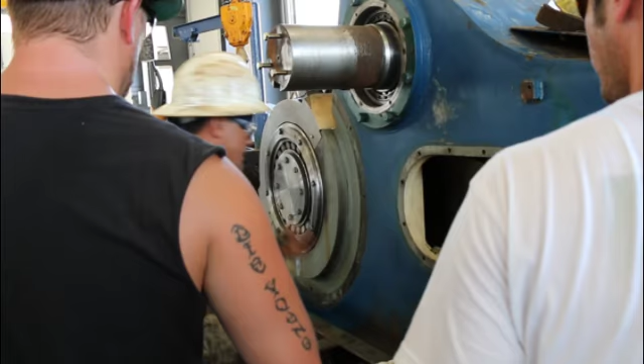Right. But that's why they make this clear thing. You can come in and look, the pressure gauge ain't working, but you see here you got steady oil coming down. All you gotta do is, hey man, we need to order the pressure gauge to put in there. Usually we put it there, or we put them on the top. And this one's got this motor on the back. What we do is put a little line there, move it out to the back end of the motor skid. It's very important to maintain the oil levels, and like I said, that manifold. Very important to keep that thing clean.

Look at that one. Yeah. This thing's probably about 10% oil rate. Everything else on the back is good. Check this band over here. You got 8 thousandths clearance. Check everything. Only thing we're changing is all 3 crossheads and 3 slides, and we're changing 2 tops.

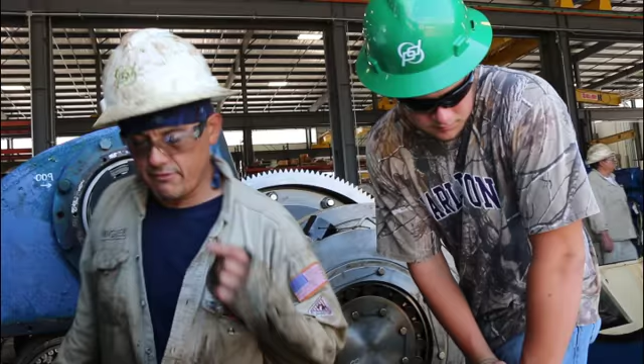When this pump's running good, this crosshead should never touch the top part, because you got from 20 to 30 thousandths clearance on top. So this one, yeah, I had a 3 thousandths on one corner. So somebody went there and shimmed it, so it got tight, I guess. And that's what you got right there.

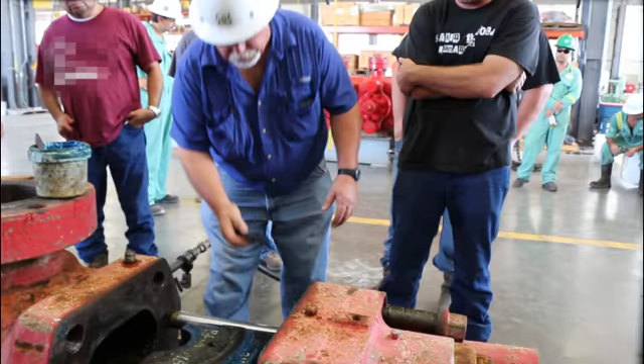But mainly you don't want it on here. You do not want it on your gaskets. You do not want it in this area right here where the gasket is. You can paint that thin film on there like I said, but grease your inside, grease your ram, but keep it off your seal areas. All around here is about a half-inch area where this bonnet seal fits.

If you got grease there, pretty good chances are. We had one that wouldn't test the other day. What did it have? A little bitty curly Q wire off of a hand brush they used. Got in between there, caused it to wash. We had to put a new one in. But that's how. One time it will, one time it won't.

Also, mud builds up little by little in between here. That's what this kind of stain is right here. You need to clean that out. That'll build up a gap, and it'll just get harder and thicker, and pretty soon your gasket doesn't even reach your face. So it won't test either. So you want to make sure you keep both surfaces clean.

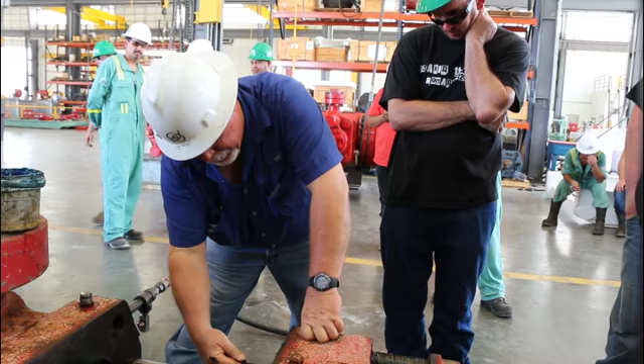Greasing it a little bit like that keeps the mud from getting in. You can put a little here, but don't put it on your seal areas and don't build it up. But that keeps it protected. See, I go like this, I pack that hole. Then when I'm through, get it off there. Literally take a rag and just wipe off your bonnet seal.

You pull your bonnet seal out, change it, you gotta clean behind it also. Surprisingly, you'll get barite and cement all behind it a little bit. Clean that all out and take it off of there. And that'll keep that from leaking too.

But everybody thinks these are invincible. They're not. It's gonna be the worst and nastiest day when you're gonna work on them, and you're not gonna want to. So if you do that to them, they'll keep you from having to stand in the cellar on the coldest night of the year, raining.

Your ring grooves, keep them clean. Your bottom ones especially, set them on board. Don't put them out there on the ground. A rock out there in that shell will scratch that stainless steel ring groove, cause you to have a leak. There you are, nippling back down what you just nippled up. Whether it be hot like today or cold in the middle of winter, you're not going to want to do it. So, like I said, you take care of them, they'll take care of you.

That's your last resort between the well blowing out and you getting the hell out of there. So they need to be working. You don't have time for, well, I got to fix this first. You ain't going to have that kind of time, guys. You got to do it right and have it ready for when the time comes.

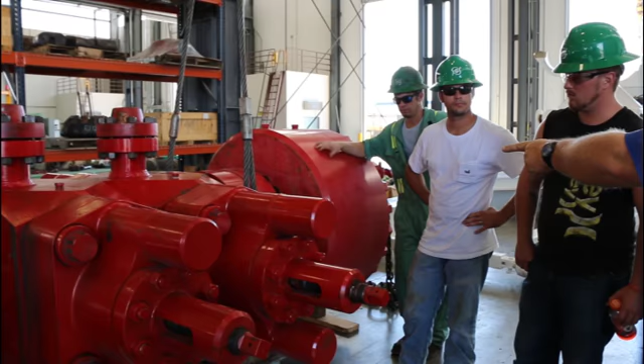Usually you have your blind rams in here on the bottom. This one happens to have variable rams in the top and pipe rams in the bottom. We're gonna stand it up. We're setting it in that handler. Y'all won't have to do anything but lay it down, stand it up, bolt the bottom up every time you move to the next hole.

Your rams over here, I'll bring you over here and show you how these operate. You see right now, they're all the way open. There's nothing in the hole. And when you close them, those rams here will be all the way closed. All we have left is that groove in the middle, which should be closing on a joint of pipe, whatever you have in the hole. That ram there should be fitting that size. If not, you shouldn't be closing it on it.

And you shouldn't be closing your blinds on anything, which is your second one down over there. You shouldn't be closing them on anything at all. It's going to mash it and then you're really in trouble. So those will only be closing whenever you have nothing in the hole. The blind rams.

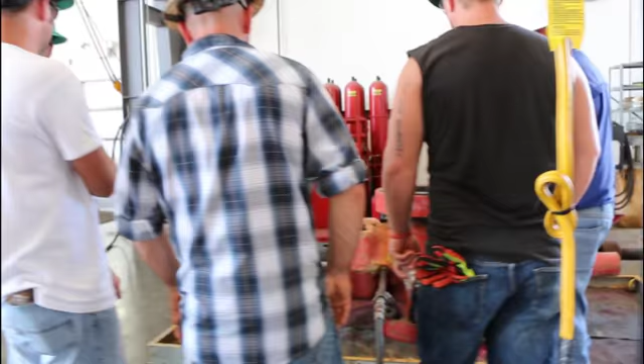Dave, close it. Foot off there, please. These are, when they're closed, open is open. It's that position there, it's all the way open. Closed is going to be closed. The rams are going to close. But when you're trying to open the doors to operate them, they're backwards. Open will be closing them. Closing will be opening to open the door all the way up, which he's got it on closed right now, which is this side right here.

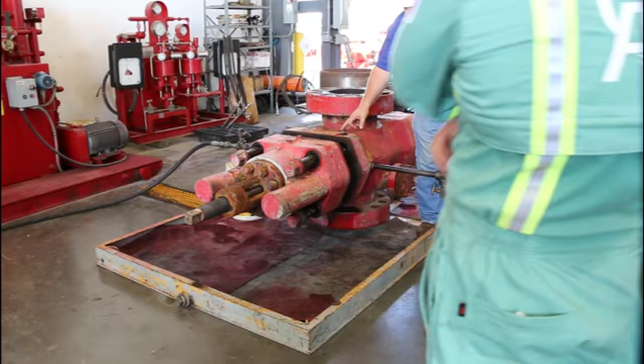Just put it on open. That's top right there. That's where you need to watch your ram packer and go slow, because it tends to pooch it out sometimes and it'll just cut it and ruin it before you get closed. So when you get in that area, just slow down, take your time, watch it. Somebody there maybe push it with a stick or something. Don't stick your fingers in there, don't stick your hands in there. And then walk it in a little.

Usually on the rig you're going to have your air pumps. No, they don't have air pumps on this rig. So you're going to be using your hydraulics just like this one is with your electric. So you pump it closed, stop, back and forth. Run it on in, David. And you can pressure it up like that, screw your bolts in, and then release it, and then get your hammer and tighten all your bolts up.

When you go put your bolts in, start them all by hand. I don't care how good you are, don't use the impact, because it has a tendency to cross thread them the first 3 threads, and it's miserable after that, guys, I'll tell you that now. So just start them all by hand, get them in there 3 or 4 threads. If you don't have an impact, run them in the rest of the way by hand.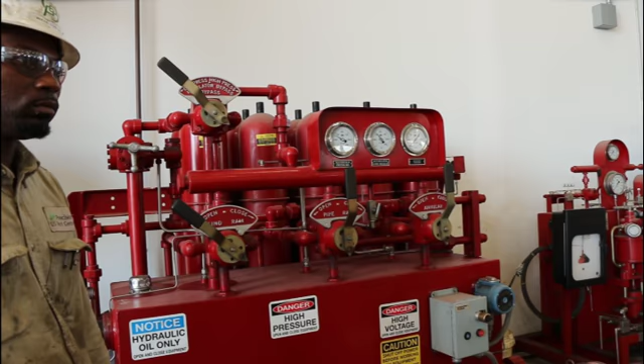This is your closed side, that's your open side. They should always be labeled, so if they're not, y'all need to get them labeled, and then they correspond with your accumulator over there. And that one would be blind rams, that would connect where he's at right now. I would hook up the middle one there. Next one would be, and then you're going to have another one assigned to your HCR valve, which bolts on the side of your drilling spool.

Your bottles are all going to be pre-charged. Should be at least 1,000 pounds. Those valves would actually be open, which we're not using right now because we're just gradually working this thing on. That holds the pre-charge of 1,000 pounds in every one of the bottles. Without turning that pump on, you can just shut the rams and the water ain't having enough juice.

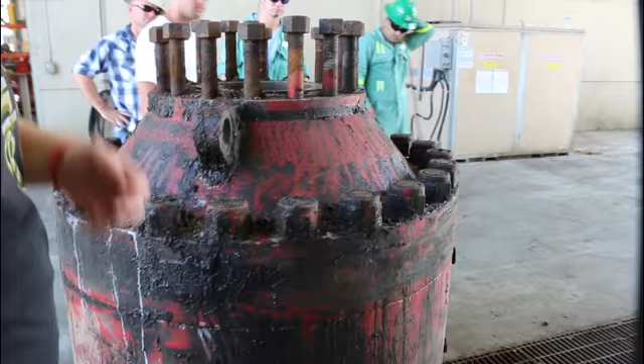This is an annular from a rig. I'm not going to give the number. We don't expect them to be kept up like this or sent in like this. If the ports are wide open, it was probably leaking on the truck going down the road. Highway Patrol will pull them over and give them a ticket for environmental spillage on the road. Those need to be plugged, even when they're on that hauler, your own truck, or if you're sending it out to get changed. But if this is the way this looks, I hate to see what the rest of the BOP looks like.

They're not cleaning them. That causes faster wear inside the bores, like where the rams are riding. You need to open them up and get the cement that gets in there and clean it out, wash it out, get rid of that abrasive material in there. Same thing in here, you need to wash through there around that rubber. Y'all can see without getting it all over you.

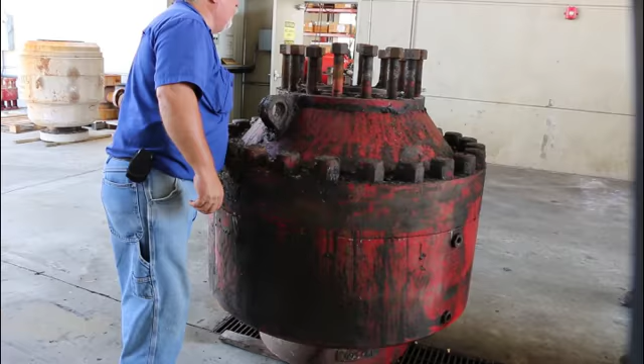These are your bolts. You take these nuts off, pick this lid up, change that packing element in there. Sometimes when you're coming apart, the bolt comes out of the body instead of just the nut off the top. So when you go back, that's all you should have sticking out of that nut, not 2 more inches of thread sticking out of the nut because it got easy or got stuck out here and then you just screwed the nut on down.

You need to back up, probably take the lid back off, get that stud out of this nut and screw it on in the body and then start over again, guys. That's a good way for it to blow off and hit somebody and have an accident. Same thing with these. This is what we call a tap-end stud. This is a standard all thread stud.

This is what's supposed to be in all your DSAs, top of these. Biggest reason we've gone back to them is, I guess common sense, they weren't realizing you could look across here and have them all the same length and know they're all the way down. This way you know all the threads are buried in there. Whatever this diameter is, you should have that much stuck in the hole. If it's 1.5 inches, you ought to have at least 1.5 inches in there.

An incident on one of the rigs. I didn't bring it up to the other guys, I forgot about it. They dropped what they call the DSA, which usually bolts onto here or underneath. So they came up with a way to lift them. This is for drilling spools only. You're gonna drop it through there. Put it on equal spacing here. Come back up. You'll pull that pin out, which has got a lock in it.

Little B pin right there. Turn it toward you. Okay, perfect. See it? Yeah. Got a tooth on it. Take it. One side is equal length. Use your air hoist or whatever, and it picks this up.

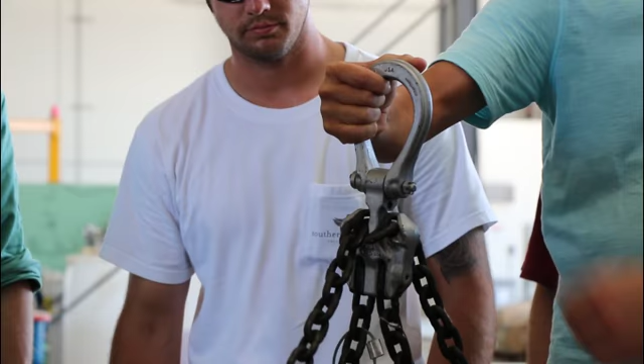Before, usually all the slings had 2 hooks on them, so it wouldn't fit through that hole. So they were tying a knot or whatever else they were doing. Or they're using a nylon sling, which has a tendency on these sharp corners to get cut. The DSA was really the issue because they dropped it. They had the sling wrapped around it and they dropped it. Fell on a guy's foot or leg, I think it was.

And broke it. So they thought they solved the remedy with this. It didn't solve the DSA. All it's taking care of is this thing here. We're still in the process of making something up. We've got some other deals out there, but you can still use your sling for right now.

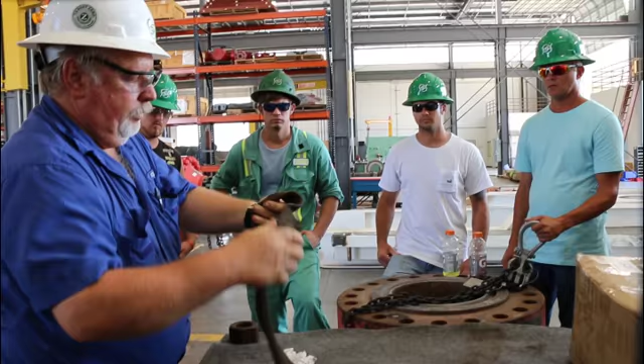Going around it, you know, going around your stud, and tighten it up where it don't come off equal. But we're still in the process of designing that. Got an idea, trying to get it approved and everything.

Here's your rams that go in there. I told you a while ago, watch out for your top seal. That's it. Comes out real easy. Get under here with a chisel, punch it on out. Comes right on out. This is all rubber except for these two little metal pins with a head right in there. This one here is all steel on two steel plates.

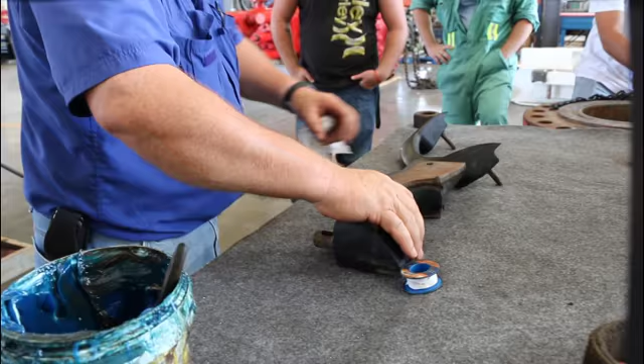You can put them in upside down. First off, let me back up. That's your size right here. It should have whatever it is. So whatever size pipe you got in the hole, that's what size ram packers you should have. So verify when they give them to you, your packers are correct. They can go in upside down. If you see here, the contour with the top seal seating on there, that's correct.

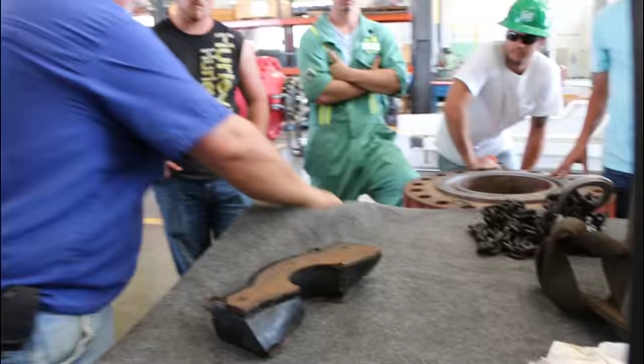Another way is, see how these are off center, your pins? Those should line up straight into your hole. They will go in upside down and really not give you any resistance. And you'd be surprised looking at how far off it is. It's not going to give you that much trouble doing it. These are them upside down. See where they hit? What's going to happen to this rib here, which you're not going to see because it's rubber coated.

We got one over there brand new, Dave.

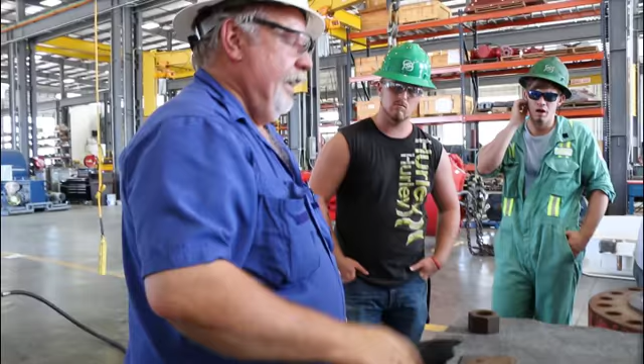You can't see it, so it's just going to sit there and plow a groove on both sides of the top of that BOP there and ruin it. They did it on one of the rigs. They did it about 4 times. It's like a machine shop, cut 2 grooves back and forth 4 times. And then they called and said it wouldn't test. Got in there, looked, and found this out. They tore the BOP out, had to change the whole stack out. So you don't want to do that either.

Got one open. These here, you'll have to get behind here, knock them out from the sides whenever you have to change them. That's that metal bar right here. You just kind of get in between here. You've got it closed right now. Chisel in here and push it, get behind it, start prying it open. You grease this and everything when you put it in, both sides.

If it's 3 or 4 years, there's not going to be anything back here. Guys, it's going to be stuck in there. I don't give a shit what you do. It's going to get rusted in there. See how you see rubber, you think, right? It's that steel there. Go in there right here and cut that BOP.

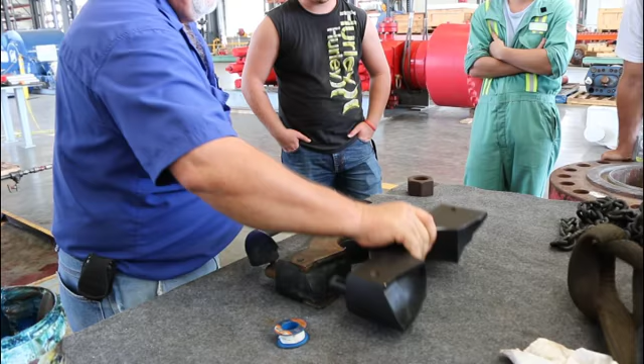So let's see here. Some of them have it. This one's got a T for top, or they have top written here usually. See how it's written 4.5? This one's got 4 inch in it. Normally, like I said, if it's where you can read it, that's right side up. But it's not all the time. It's not guaranteed. I've caught some aftermarkets.

I guess the mold got turned over or something, I don't know, but it'll have 4.5 just like this, and it's the right way up. So you just got to look at it, look at your ram, how it fits in there, and how this all lines up. And you shouldn't have any problems.

Got any other questions on anything? No, sir. If you got any other, you're welcome to call at any time through your pusher or just yourself. I don't care.

That's going to be your handler. We're going to, like I said, hang that on there. It'll be hauled away. There's pins in there that have got to be greased regularly. Probably get ignored. They're up underneath. We grease all of them right now. That BOP is going to set on there, guys. There's nothing holding it. If you put it on a truck, he goes down the road and slams on the brakes, it's going out the front. There's nothing holding it in there.

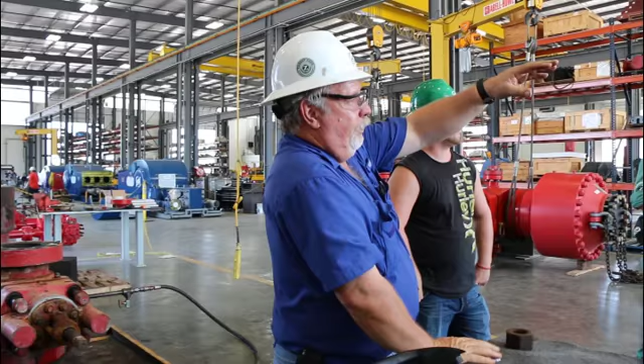It's not clamped. So once it's put on there, the truck driver's going to have to throw a chain around it and clamp it. They put 2 little D-rings there, if y'all see right there on the back. But really he needs to clamp it to the main beams or whatever, throw a chain around it. And probably back here to the single, it's going to be sticking out, and just keep it from walking on you. But that's really the only thing to that, other than lifting it up and down with the hydraulics. The controls are all right there, which I'm sure somebody else will be controlling at first till they train y'all with it.

There's a little independent hydraulic unit that goes with it. It pins right here in the front on each side in the substructures, so that when the BOP is standing up, the weight is all up here in the front when they're going to move the rig, and it'll walk. Those pins are holding it in the substructure, so it'll lift with the whole substructure, the front side here and the back, but all your load will be up here in the front because the stack will be up here like this. And that'll lift and walk with the rig whenever you're moving the rig into the areas you're going to be working in.

That's what those little pads are, to tighten it up on each side. They weld them on so they tighten them up in the sub.

Anything else? Frank, did I leave something out? Like I said, your impact, don't use it. Going in, it'll so easily screw those threads up. That's for the impact. You can grab just one little corner and there you are, you're screwed.